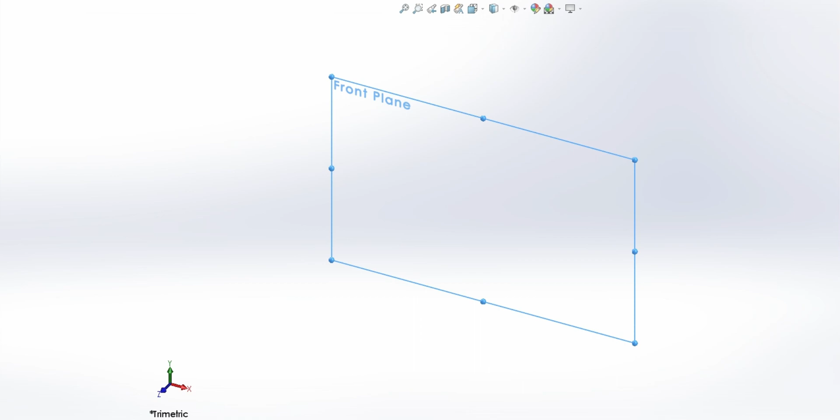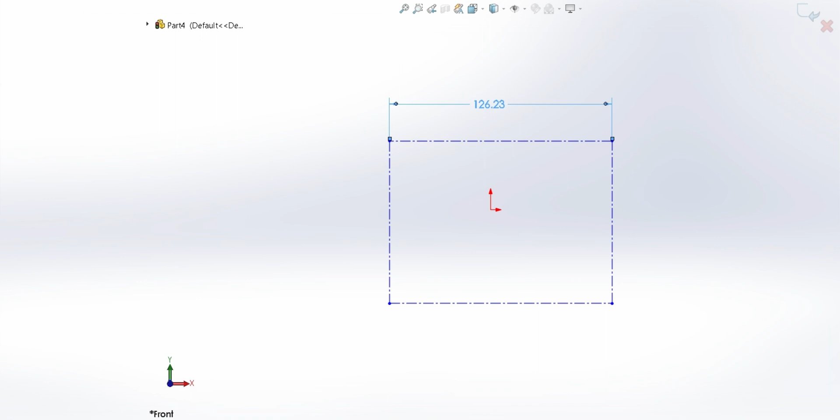What we're gonna do is center lines and construction lines, so we can just get an idea of how big our batarang is gonna be. After you have that done, make sure you're in millimeters. So go ahead and define your build size. I'm gonna do 200 millimeters and 200 millimeters.

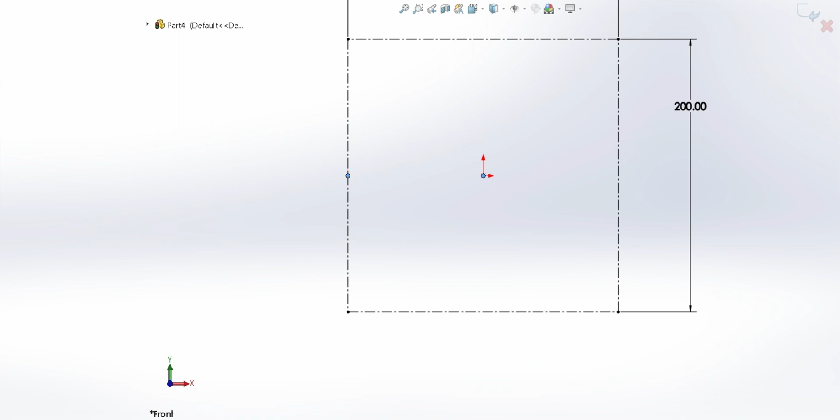And now what we're gonna do, since it's defined, we're gonna take our origin and then center it. And middle, and then we're gonna do it again. We're gonna make this horizontal. So now our origin is directly in the center. So from here, take another center line and put it right in the middle. Alright, so that's done. And this will be important for later.

We're going to be using the mirror feature. So what I want to do is take our center line and build out. So I would like to say this is going to be 80. For this one, don't start it on the middle. Just start it below. And that's because this is going to be 90 millimeters, and this is the edge. This is the edge of the batarang.

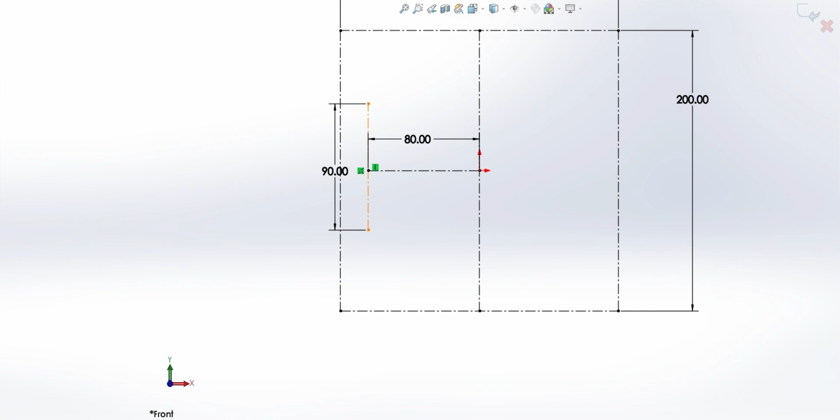And then you're gonna want to find that yellow line. Let's pull this further out so we can get to it. Or we can just smart dimension this to be 45. There we go. And now we can do the same for the middle of this one. This line is going to be 50. And once again, do 25. We want it right in the middle.

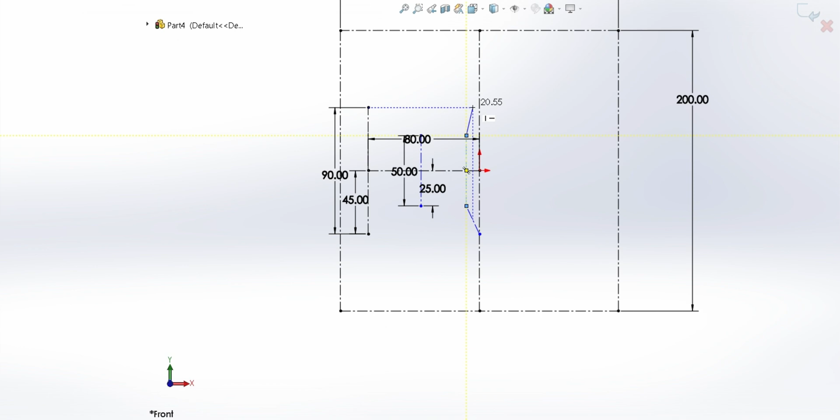And now we're going to be doing the tail. So make sure when you do this that it's like that. Now depending on how tall, I take it at 25. And I'm going to pull this up to that 25 mark. And now this click is for that batarang. And now I'm going to click again, and that's so I can get the horns on the batarang. And as you can see, what we're doing is just building the bones of the batarang, and this is so it can be defined easier.

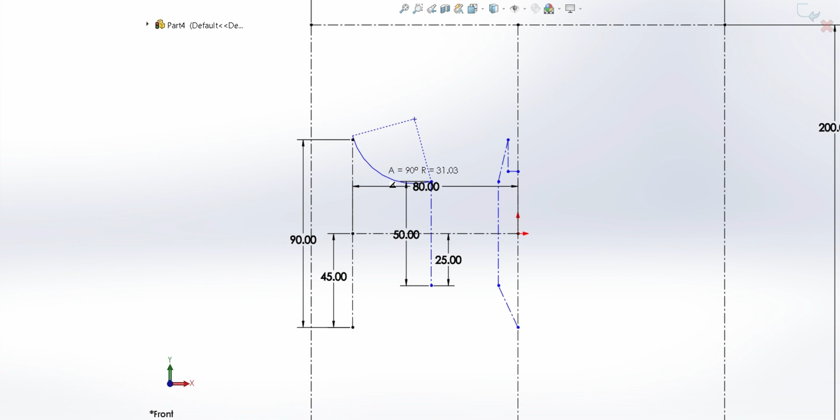Now that we have that done, we're going to use a tool, and we're just going to click the top of these points. We're going to click it again, and then I like to pull it to where it gives us that triangle. Let's get this edge done, and look at that triangle. And then we can do it again here. If you want an equilateral batarang where it's the same on top and bottom, I don't want that, so I'm going to pull it just a little bit higher to make a semicircle.

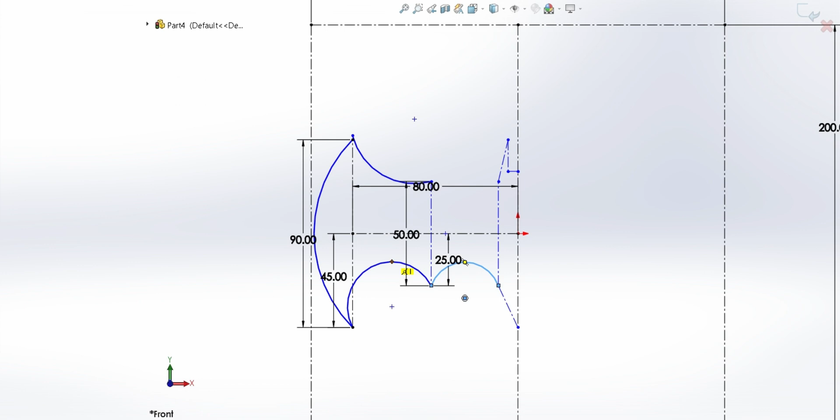And now from here to there, we can either pull this higher to this line and make it tangent, or we can leave it and make it not so aggressive. I like that. I'm going to try to make this horizontal to the other point. And if you want to do that, we can click the tops. Well, just try to make it as close as possible. It shouldn't change on you. And let's do this one, and bring it over to that. And I like how that looks.

But now that I'm looking at it, I kind of want to change that. So I'm going to delete that, and we're going to go over it with the 3-point arc again. I want it more even. I think that's about right.

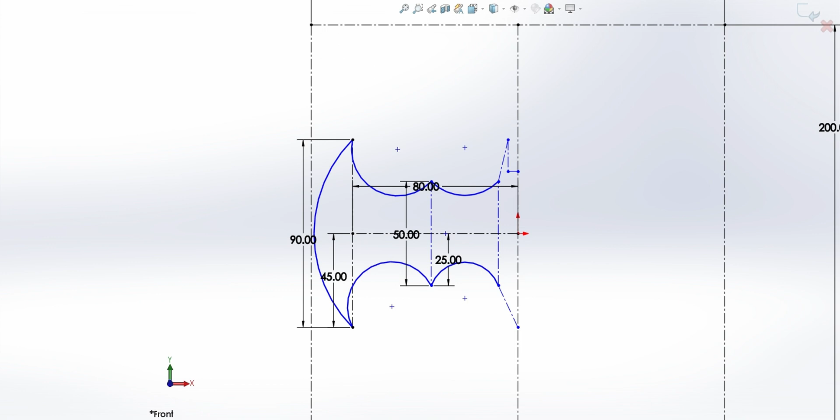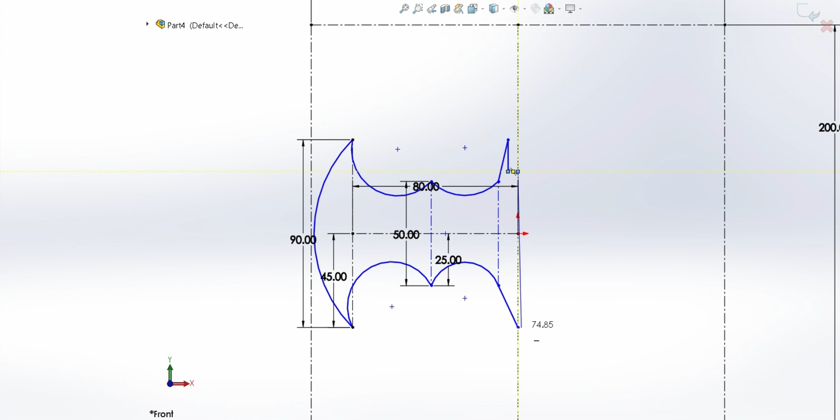And now what we're going to want to do is start here to there, and then you're going to want to click on the top right here to there, and just follow that outline you made. But don't close the shape in here. Don't click here or there, it won't close. Just click it back to the beginning, and now you have your contour and it's filled.

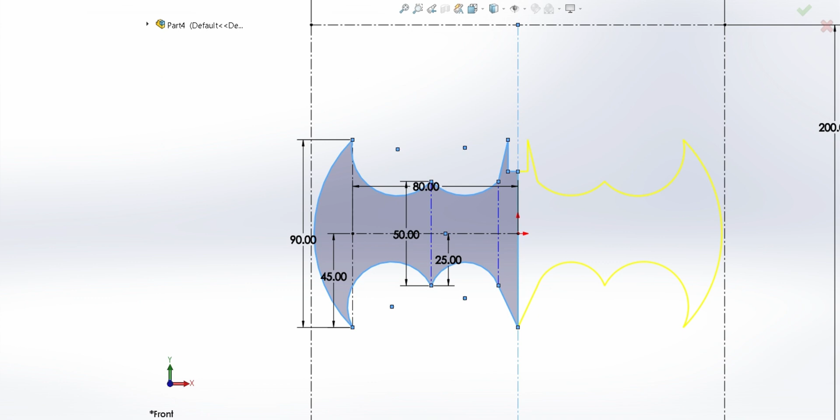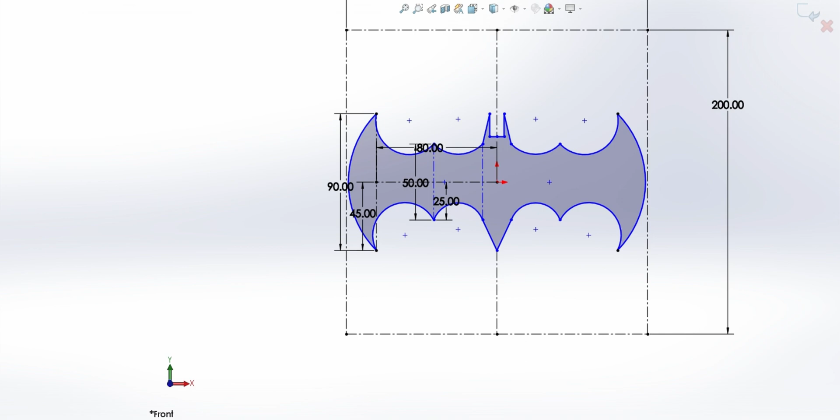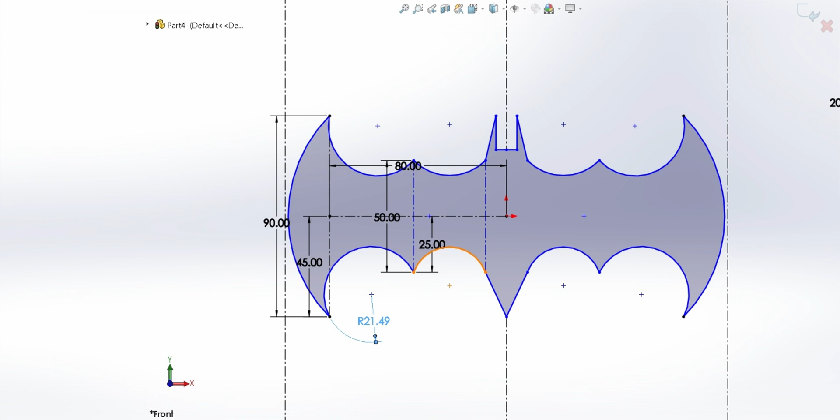And so from here you can fully skip as we define the build plate size and it will print exactly like this, or we can go ahead and define it. For me, I'm gonna go ahead and define it, and you can follow along with where I'm defining it. So these parts are already defined. Now what I'm gonna do is define the radiuses. And I'm gonna have to do that on all of these. And then this one.

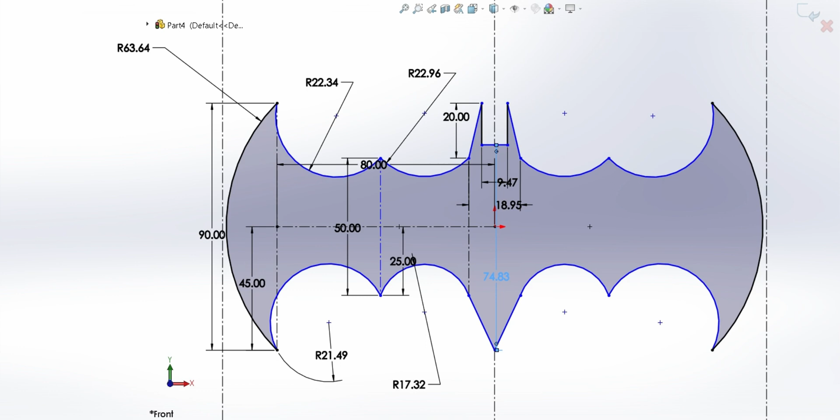And then we got to do the single line here. Oh, not that. We take this, measure that out. And we can measure the width here again. We can measure this. So what we're looking for is to get rid of these blue lines. And then we're going to take this, measure this. We're going to measure from here to there. And we're going to measure here.

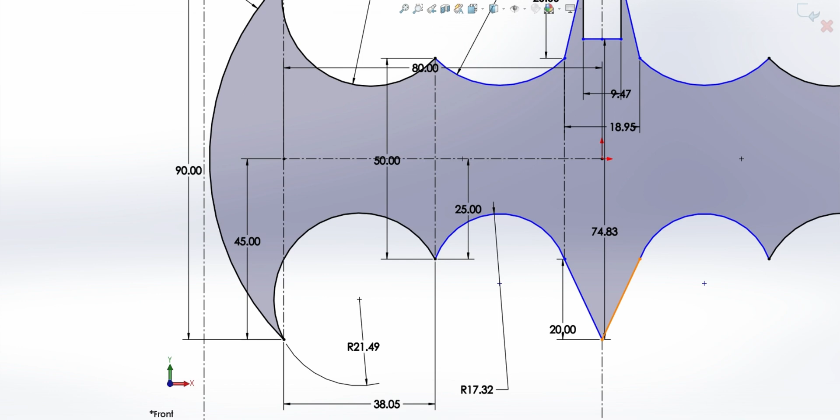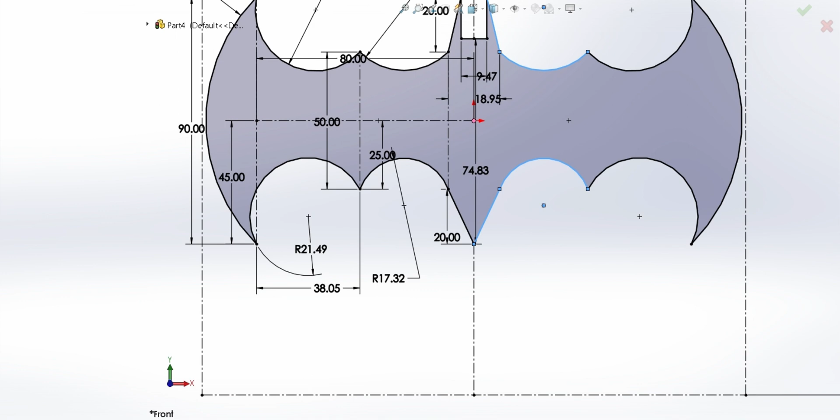That over defines it, so we don't want that. Now I believe what we can do is define it from there to there. No, I guess we can't. Alright, from now, I'm just going to click Fully Define Sketch, and I'm doing selected entities. And these are the parts that I need to be defined, and then I should be able to press calculate, and then OK. And now it is fully defined. It is now ready to be extruded.

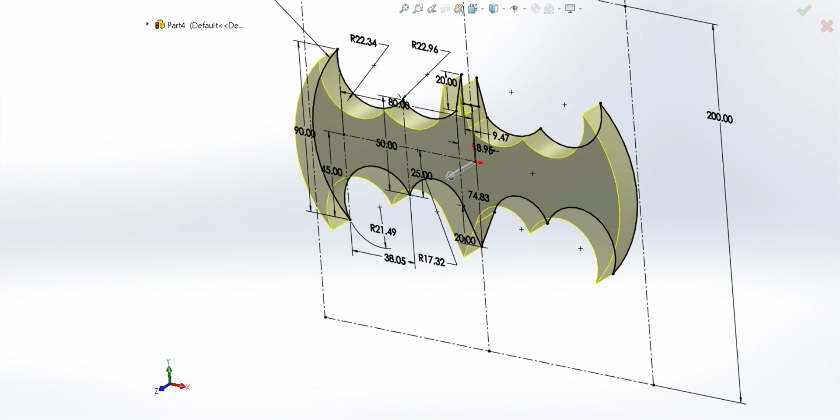So we're going to extrude base, and I want it to be around 15 in the depth. That's just because we're going to be filleting and chamfering the edges, and I just want it to be a little bit hefty so it feels like a batarang. So go ahead and extrude that, and there we go. Look at that. It's not looking too bad. And from here, we're going to chamfer. And so 7.5 millimeters in that, so it meets right in the middle.

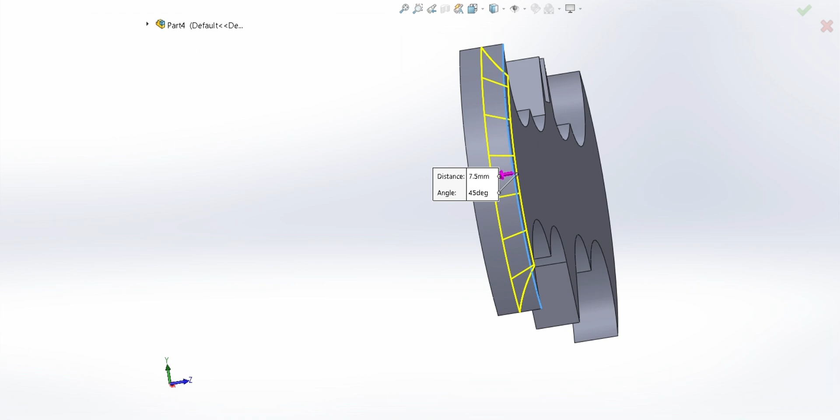And now just follow along on clicking all these edges that you want, but make sure you do them in the same order that you do on this side, or you will run into problems. So I'm going to do the top first. I'm going to leave those horns. I like how they turned out, but let's give it a preview on what it could look like. Not too bad.

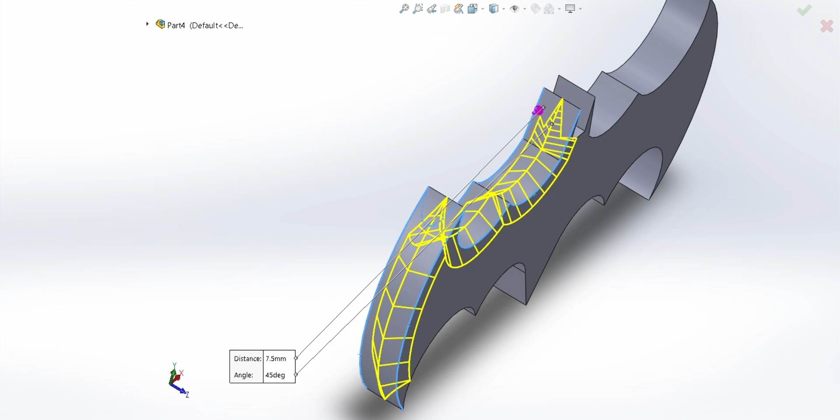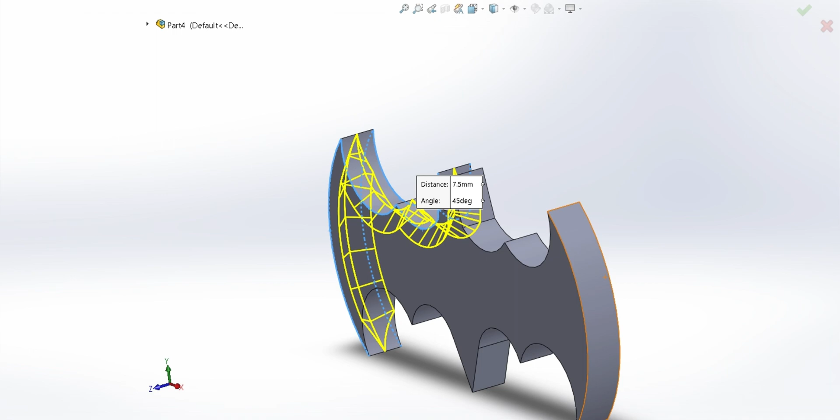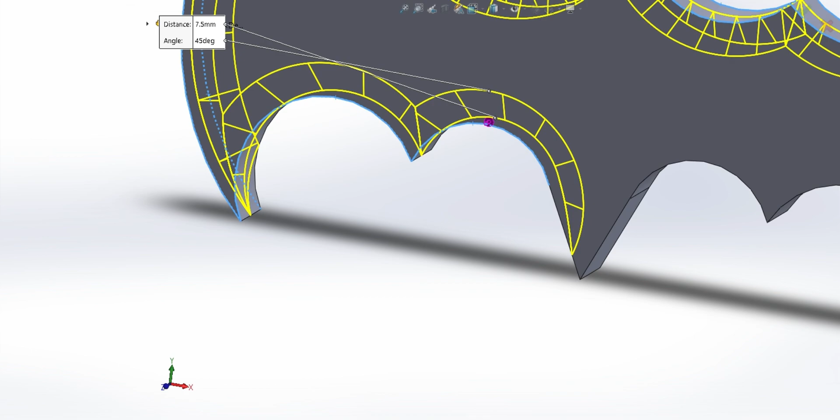I'm actually gonna chamfer the tops of those. And like I said, follow the same direction or you'll run into an ugly chamfer. And then click. And there we go. We got the top done. And now for the bottom. And then we gotta click these. Oops, not the face. Delete that.

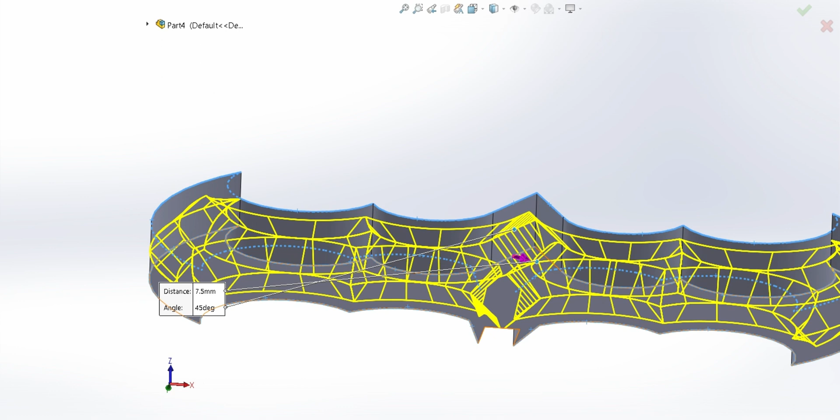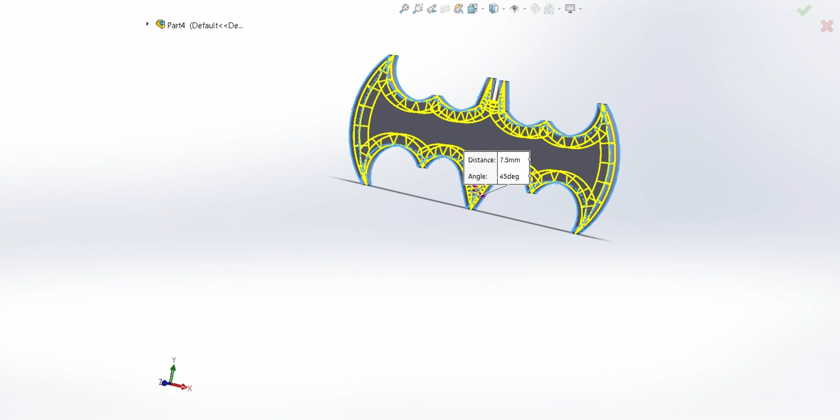Alright, so once you have everything selected, go ahead and click the green check mark. And there we go. We have our Batarang. And now that you have this, I would click save. Save, and then click save. And then I click yes. Bodies. And now that you have this saved, you can go ahead and open up Cura.

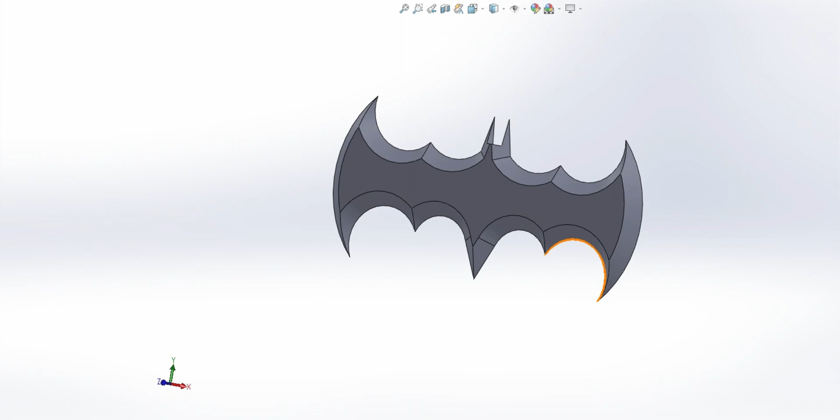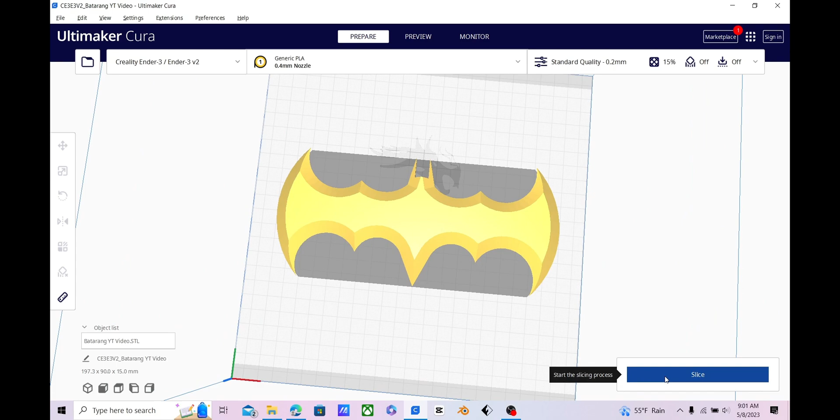Alright, so we have made it into Cura. So what you're going to want to do is hit File, Open, and Batarang YouTube video. There it is. This is your Batarang. And see, this is why we defined it. And now we click Slice. And it's going to take 4 hours and 17 minutes.